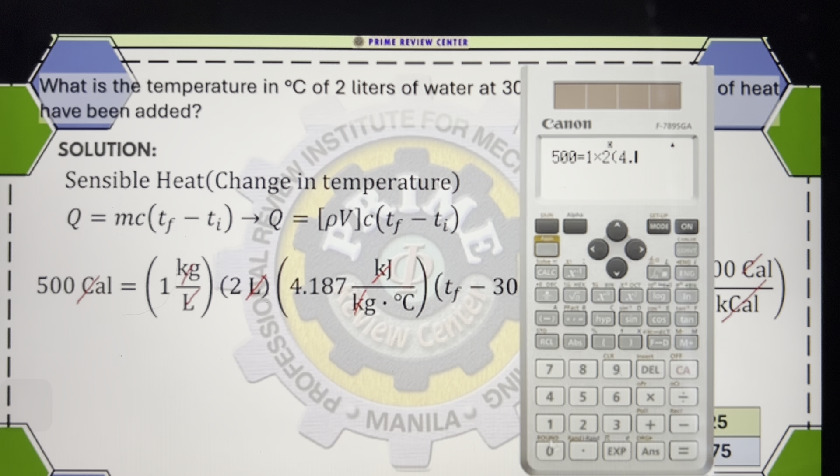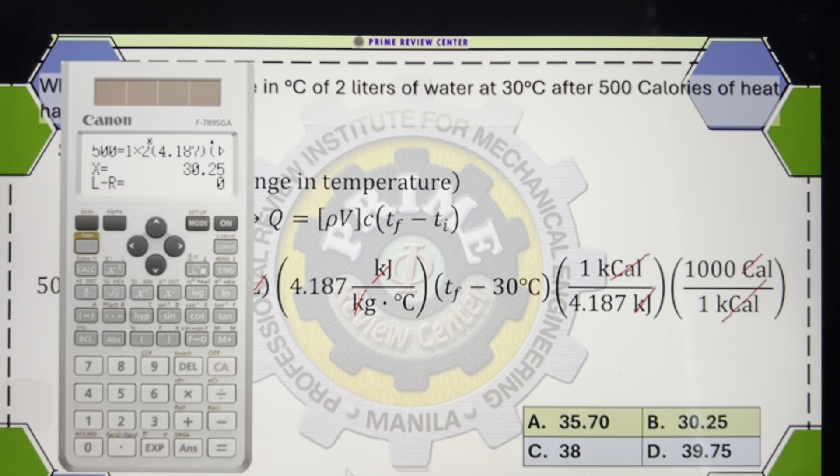So lagay ko lang yung values. So this is 500. I-equate lang natin sa density, that is 1, times volume, that is 2, and times 4.187, yung C ng ating water, times yung change in temperature, that is final minus initial na 30, then yung conversion factor natin. So that's 1,000 sa taas, sa ilalim 4.187. So actually, pag ginawa natin to, i-shift solve na lang natin sa calculator. Press equals, at makuha natin yung value na equivalent sa letter B. Okay? So yan yung ating sagot sa problem.

Sige, so another problem sa ating power industrial plant engineering. Basahin ko lang. So assuming compression is according to the law PV equals constant, calculate the initial volume of the gas at a pressure of 2 bar, which will occupy a volume of 6 cubic meter when it is compressed to a pressure of 42 bar. So naghahanap sa atin dito ng initial volume ng gas. Given sa atin, etong particular law ng ating gas, PV equals constant. So pag nakita niya na may ganyan, meron siyang given na rule para ma-solve yung problem. Ganun lang actually yung gagawin natin.

So what this means is, i-equate natin yung pressure and volume sa compression natin. So multiply mo lang yung pressure and volume, tapos i-equate natin sa another pressure and volume. So ibig sabihin nun, yung pressure times volume sa point 1, i-equate mo sa pressure times volume nung another point natin, which is point 2. Diba? And from the problem, we are given with initial pressure, that's 2 bar. Volume, 6 cubic meter. Then meron tayong final pressure, that is 42 bar.

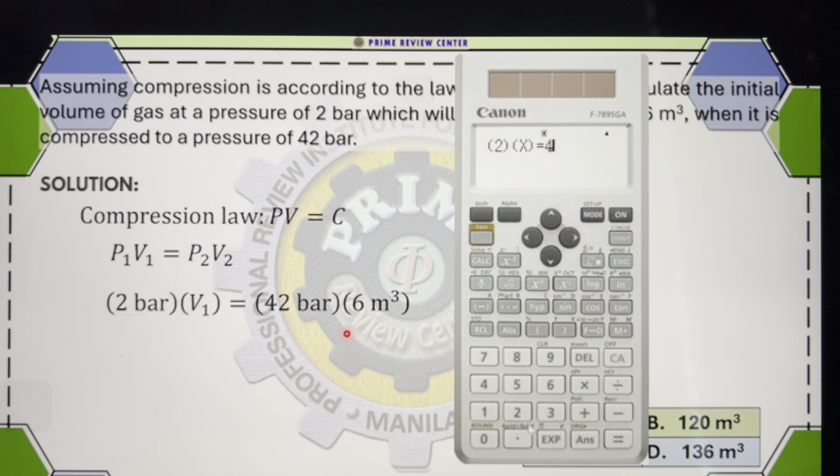So, simply substitute. So, meron tayong 2 bar times yung hinahanap na initial volume equals yung final pressure, that's 42 bar, times yung volume na 6 cubic meter. That's yung final volume natin. And so, initial volume hinahanap, given ka initial pressure kaya nandito to. Then, final sa kabila. So, basically, what we needed to do is simply substitute lang yung ating mga values. And from the units, makikita nyo, magka-cancel out yung unit ng bar at ang matitirang unit ay yung cubic meter. Diba? Sige. So, anyway, i-shift solve lang natin to sa calculator. What we would end up with is yung 126 cubic meter na volume. That is yung letter A natin.

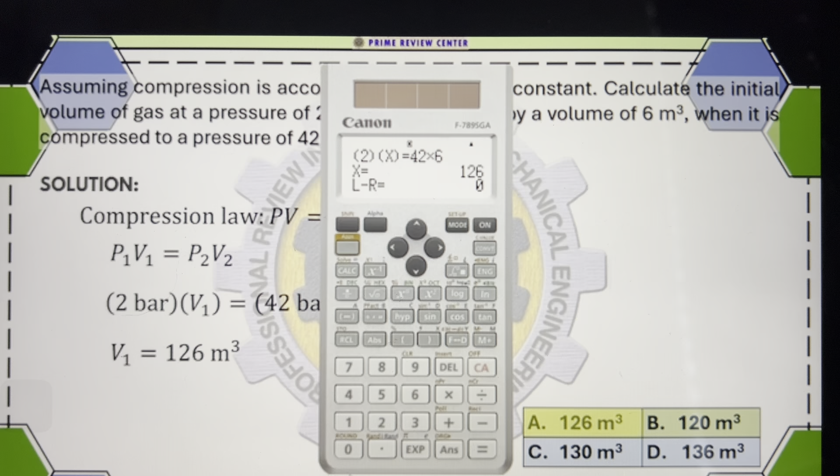Yeah, so another problem regarding sa power industrial plant engineering natin. So, basahin ko lang. A steam condenser receives 10 kg per second of steam with an enthalpy of 2,570 kJ per kilogram. Steam condenses into liquid and leaves with an enthalpy of 160 kJ per kilogram. Cooling water passes through the condenser, temperature increases from 13 degrees Celsius to 24 degrees Celsius. Calculate the cooling water flow rate in kilogram per second.

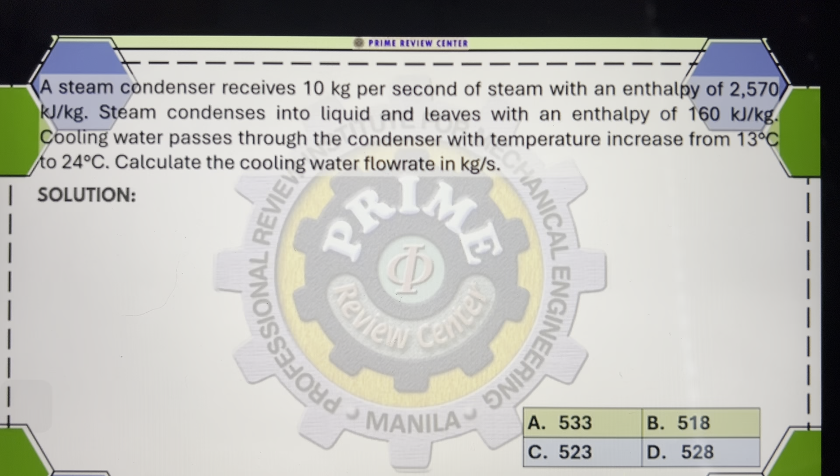So, hinahanap ang cooling water flow rate. Sir, paano natin mahanap yung flow rate na yun? So, we need to determine from the given yung ating nangyari. So, meron tayo ditong steam condenser. Okay, so, i-drawing natin yung steam condenser natin na meron pumapasok daw na steam at saka meron siyang pumapasok na water, cooling water, yung kapalan sa steam.

So basically, a diagram of that is ito. Ito yung ating steam condenser. May papasok dito na steam. So yun yung 1 to 2. Diyan magkakaroon ng heat rejected from the steam. So yan yung heat ng steam. Then meron papasok na initial na cooling water. Then kukunin niya yung init na to. Tapos lalabas yan. Siyempre para magkaroon ng cycle, di ba? Dun sa papalamig ng condenser natin.

So basically, what this implies is yung heat na nireject ng steam ay basically yung heat na na-absorb ng cooling water natin. So what we will get is this equation. QS, Q ng steam, and QCW is the heat from the cooling water. Diba? So, yung heat ng steam, since we are given with enthalpies and mass, can be solved by mass times change in enthalpy. Mas mataas yung pumasok sa steam kaysa yung lumabas. That's H1 minus H2. So, inlet minus outlet.

However, sa heat ng cooling water, meron kang change in temperature. Kapag meron kang change in temperature, yung formula na gagamitin for heat is sensible heat. And that is yung m c delta T. So, from the problem, given ka na mass ng steam, dalawang enthalpy given, 2570 tsaka 160. Yan yung leaving, at ito yung entering. So, meron kang H1, H2, mass ng steam. Sa may cooling water, mass ng cooling water yan yung hinahanap. C ng cooling water is constant. Then yung dalawang temperature is given, 13 tsaka 24.

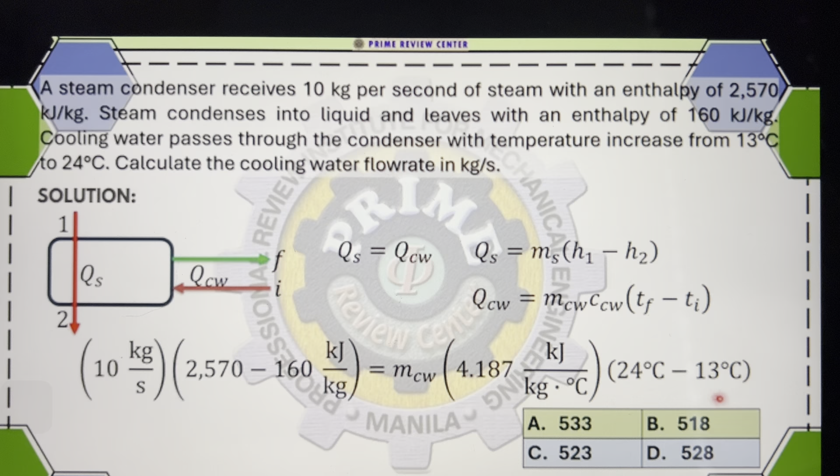Pag dinirect sub mo yan, this is what we will get. So that's 10 times 2570 minus 160. Equate natin sa mass ng cooling water times yung C ng water, that is 4.187, times temperature final minus initial, 24 minus 13. So we simply substitute that and shift solve natin para makuha yung mass ng cooling water. Sige, so lagay ko lang yung values.

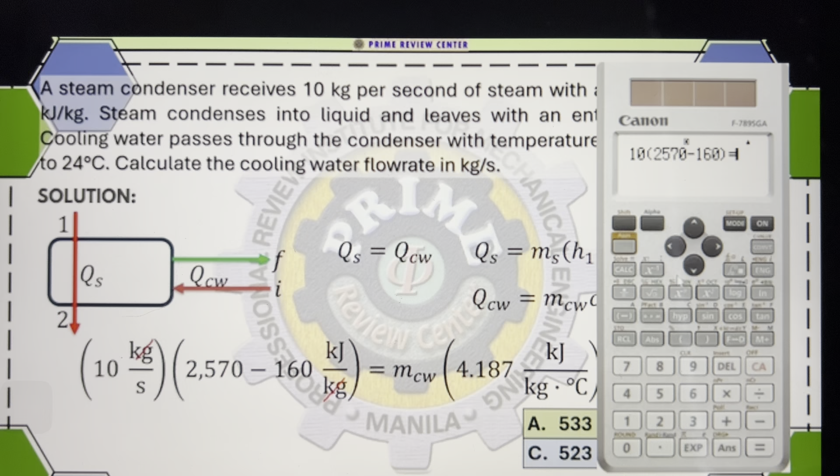By the way, pag chinek nyo yung units, dito sa kaliwang side, magka-cancel out yung kilogram, di ba? So, matitira dyan, kilojoule per second, that is kilowatts. But we can also see from the other side na may magka-cancel din. Pag nilipat natin sa kanan na side, magka-cancel out yung Celsius, pati yung kilojoule. So, matitira sa atin sa kanan ay kilogram, which fits dun sa unit na kailangan natin, kilogram per second. So, may second pa dun sa kaliwang side.

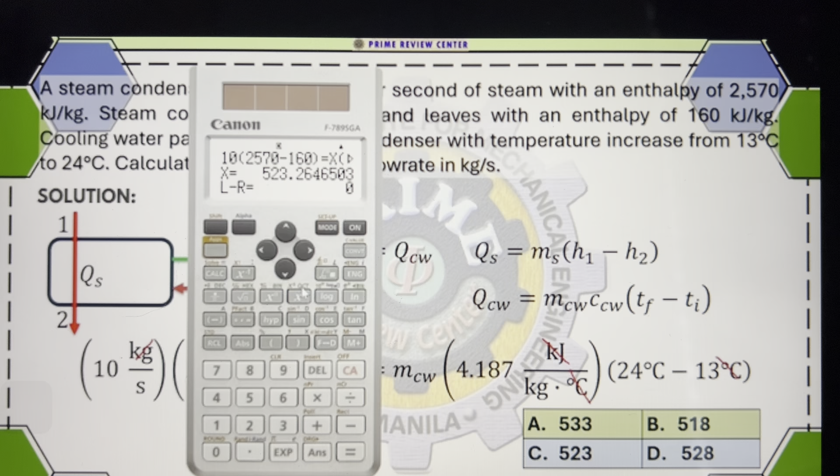In any case, i-substitute natin to para makomplete natin. Hinahanap ang mass ng cooling water. So, pindutin lang sa calculator. Shift solve, press equals, and makukuha natin yung 523.26 kilogram per second. So, yan yung from the choices, letter C natin.

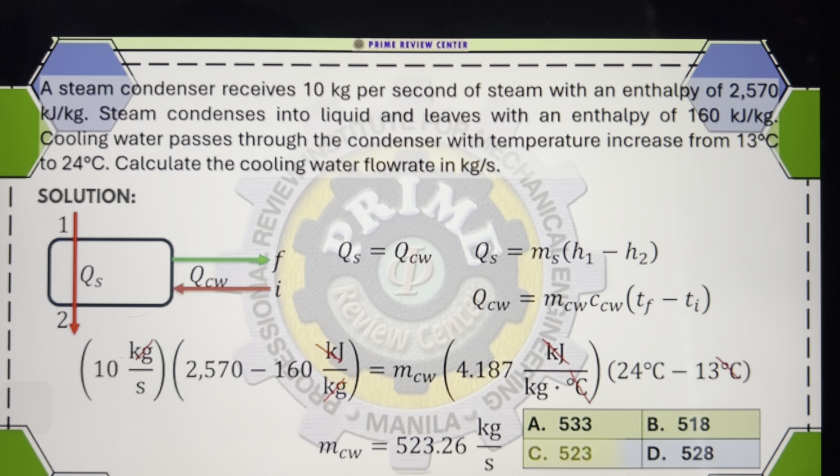Okay, so another problem sa ating power and industrial plant engineering. What is the specific weight of air at 760 millimeters of mercury absolute and 22 degrees Celsius? So let us solve this specific weight. We need to recall yung tinatawag natin na density, lalo na kapag yan ay ideal gas. Air is considered as an ideal gas. So yung specific weight natin can be solved using yung laws ng ideal gas. Specific weight in more general sense is density times acceleration due to gravity.

So we know that this is an ideal gas. At ang density ng isang ideal gas can be determined pag given ka ng pressure at temperature. Napakita natin yun sa review. So given na tayo ng pressure at temperature, so we can solve for the density. So ano bang formula ng density? Yan yung P per RT. Yan yung density natin ng ideal gas. Times the acceleration due to gravity para maging specific weight. So pressure is given, 760. R is constant.

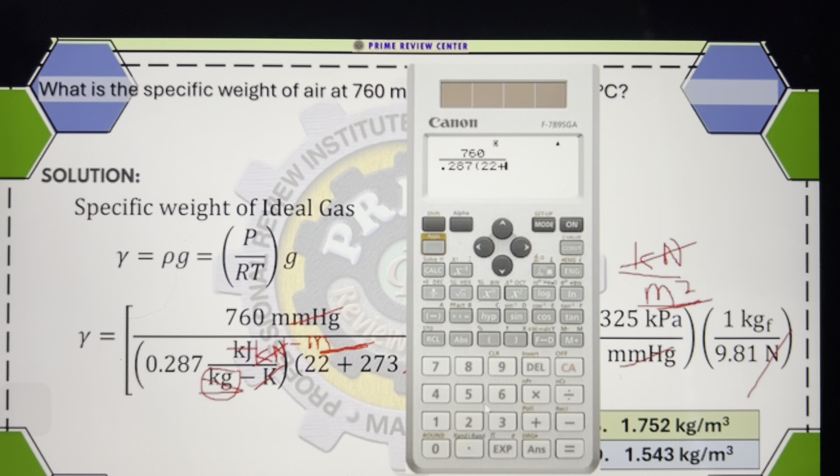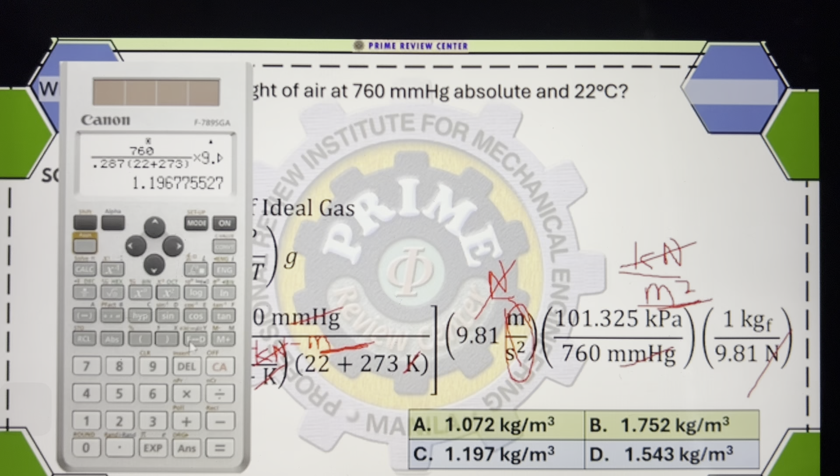So meron tayo 760 over 0.287... So kadalasan sa power and industrial plant, conversion of units and mga constant is very necessary to solve yung mga problems natin. Times 9.81, times 101.325 divided by 760. So press lang natin equals. What we would get is 1.197 kilogram per cubic meter. Yun yung letter C natin.

Okay, so another problem sa ating power and industrial plant engineering. Steam expands adiabatically in a turbine from 2000 kilopascal, 400 degrees Celsius to 400 kilopascal, 250 degrees Celsius. What is the effectiveness of the process in percent, assuming an atmospheric temperature of 15 degrees Celsius? Neglect changes in kinetic and potential energy.

Naghanap ng effectiveness, given tayo ng properties ng steam. So paano natin masasolve yung effectiveness? At ano bang effectiveness? Kung turbine yung pinag-uusapan, meron tayo steam na papasok sa turbine, tsaka lalabas sa turbine. Yung papasok, point 1. Yung lalabas, point 2. Meron siyang gagawing work sa loob ng turbine natin.

Kapag sinabing effectiveness, we are measuring yung work na pwede nating makuha sa turbine. So basically, that is work output ng turbine divided by yung available energy or yung exergy na tinatawag. We know how to solve yung work output. From our review, that is simply yung difference ng enthalpy.

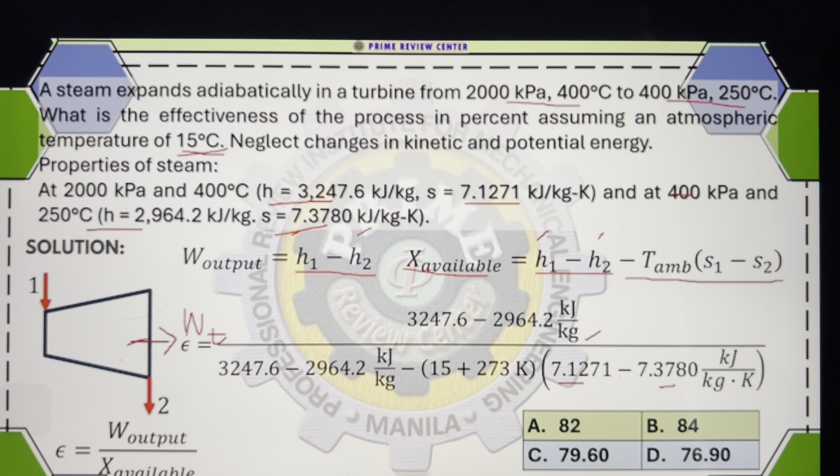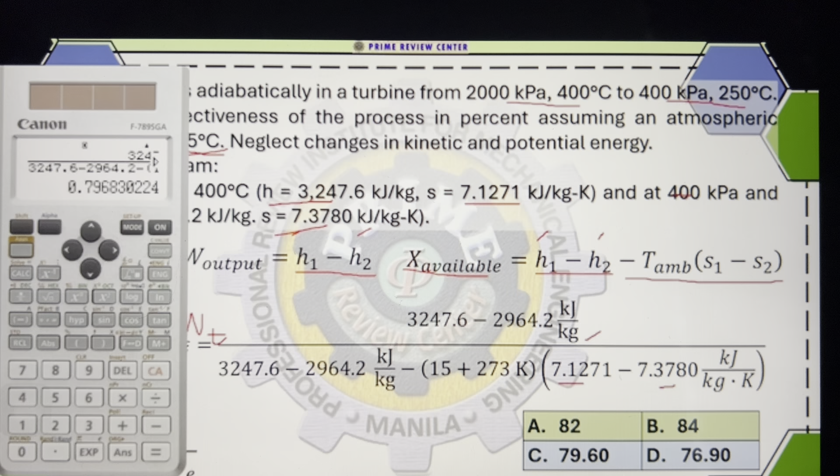So we can now solve yung available energy. Meron tayo 3247.6 minus 2964.2, divided by 3247.6 minus 2964.2 minus 15 plus 273, times yung entropy, 7.1271 minus 7.3780. Press mo lang equals, and makukuha na natin yung effectiveness. That is 0.7968, or 79.68%. Ayan yung letter C.